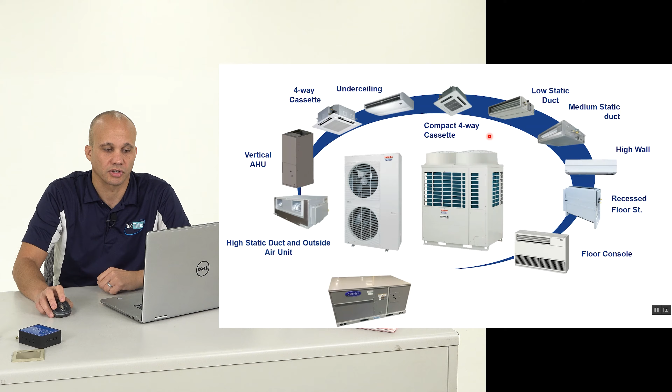For the smaller stuff, we typically have this stacked style with a horizontal discharge on it for the condenser air. And then for the bigger tonnages, like 6 tons and up, you'll see this vertical discharge air style. And those guys can get bigger and bigger. We can bolt them together, so we can take multiple sizes and connect them together to get larger and larger tonnages.

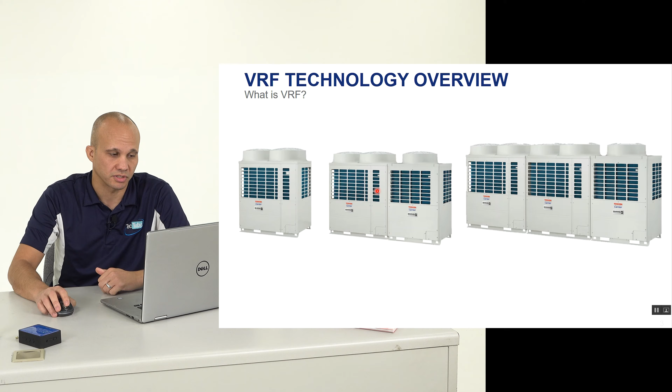So you can do anything from a little 3-ton office space to a 30-story high-rise building with this. It's pretty flexible in that regard. And you may or may not have multiple systems. So I can manifold them together on the outdoor side to connect them up.

So you can buy these in a heat pump version or a heat reclaim version. The heat pump version is typically 2 pipes. The heat reclaim is 3 pipes, although that's not always the case. The heat pump version is the easiest to explain. It works exactly like a regular heat pump. If you're not sure how a heat pump works, we have videos on that you can watch and learn about the refrigeration cycle.

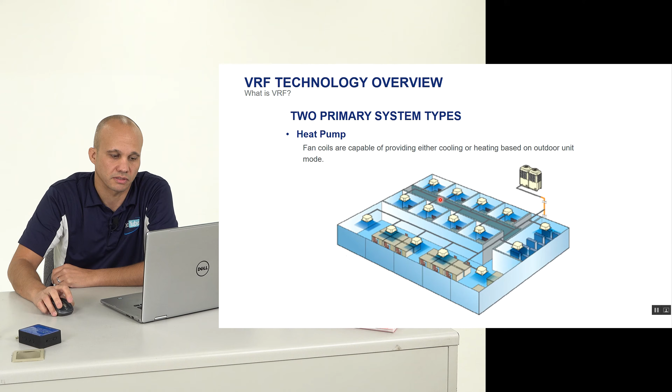So I have my 1 or 2 outdoor units, in this case 2 outdoor units, manifolded together. They send refrigerant down to all these individual units down this piping grid. And each one of those takes refrigerant off. It's kind of like ductwork. It starts out with a large pipe, and it gets smaller and smaller as you get further away from the unit because you keep branching off from there.

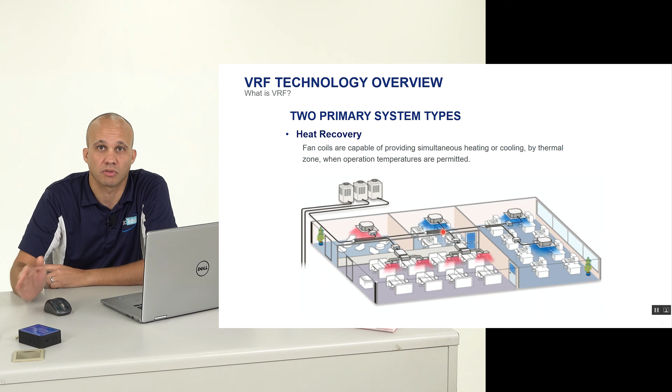The heat recovery is typically a 3-pipe system. So I'll have multiple pipes coming down the middle of the building, and then they'll be going into each individual unit. We need the 3 pipes because we're going to run simultaneous heating and cooling, and I'll explain exactly how that works. So if I have a 3-pipe system, or a heat reclaim system, I have 3 flavors of that shown here on the left. So what I was describing was a 3-pipe system.

So 3 pipes leave the outdoor unit, they go to the indoor units. Each one of them has a selector box where it picks either hot or cold refrigerant and sends that to the indoor coil. You could also have ones where I have refrigerant come down into a larger selector box. Instead of a 1-to-1 relationship of selector box to indoor coil, I can have a selector box feeding 2, 3,

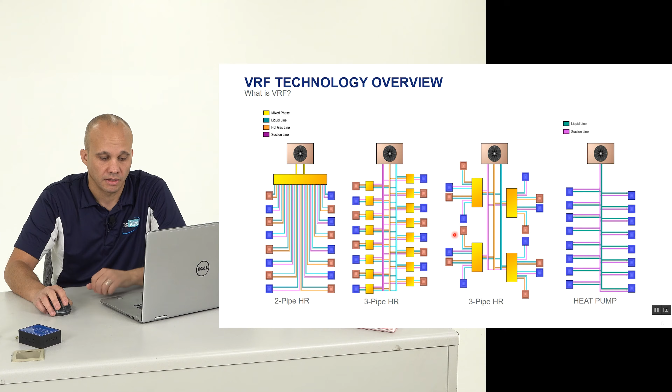4 indoor coils. Or I could have a 2-pipe heat reclaim where I have a very, very large flow selector box that all of the indoor units have to home run their piping back to. And there's different combinations of that. So what that might look like is you might have the outdoor unit sending refrigerant down the 3 pipes. These 2 guys are sharing a selector box. This guy has his own selector box, and then these 4 are sharing one larger selector box.

In these scenarios, even though the outdoor unit is providing simultaneous heating and cooling, each selector box can only do one of those modes. So these 2 guys together on the bottom down here, they would either be in heating together or they'd be in cooling together. Now one of them could shut off, or one of them could ask for less heating or cooling, but they can't ask for an opposite mode. They gotta go together with the selector box.

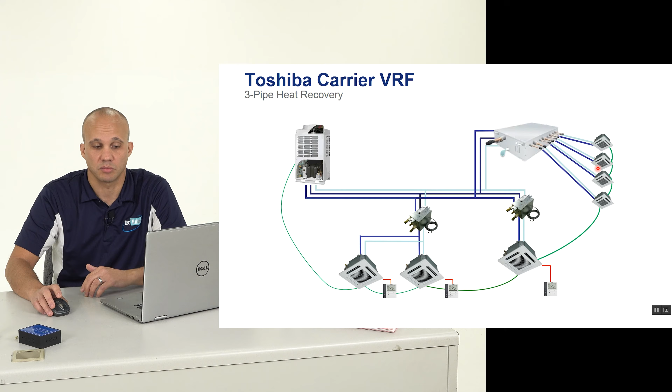But these 2 guys could be in heating while this guy's in cooling, and this guy could be in heating or cooling. So each selector box can be in one mode or the other, but everybody downstream of him has to be in the same mode. So how's that gonna work if you got multiples there? So this is a simple example. We have 2,

8 tons of cooling. So we have 5 indoor units, or 5 evaporator coils as we historically would have called them. And then outside, here's my condensing unit, which has 8 tons of condenser coil and 2 compressors in this case. It has 1 fixed speed compressor and 1 variable speed compressor in this example. Sometimes you're gonna have 2 variable speed or even 3 variable speed ones. More variable speed, the more flexibility you're gonna have, obviously.

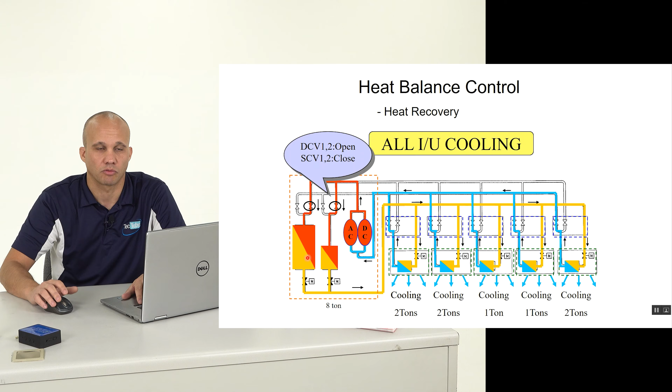So if they're all in cooling mode, they would all be wide open with all of their expansion valves. The condensing unit would be running maximum capacity, and it'd be like a regular split system, except your evaporator coil is in pieces in different rooms. If they all go to heating mode, it works the exact same way. Reversing valve flips for the heat pump.

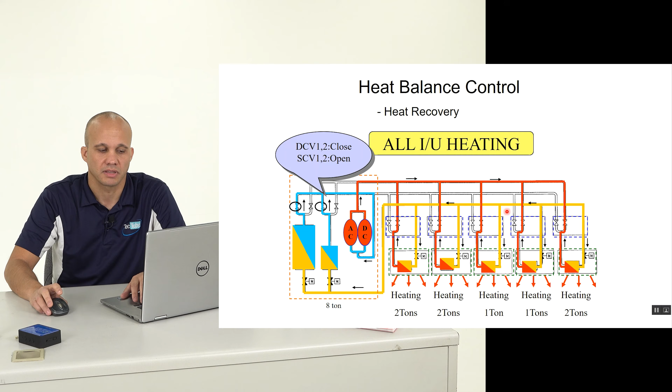Now my outdoor unit becomes the evaporator coil, my indoor units become the condenser coils, and in this case, all of the expansion valves are wide open, so I got full flow. That's all pretty logical and works kind of like a heat pump, except I have multiple indoor units. Then what happens if I have some zones that want heat and some want cooling?

So now I have 4 tons that want cooling, and I have 1 ton of heating, 12,000 BTUs of heating. So what ends up happening is the outdoor unit goes into cooling mode because more zones want cooling than heating. He runs at 3 tons of condenser capacity, even though I have 4 tons of evaporator capacity requested. And that other zone that wanted 1 ton of heating, he's a 1 ton of condenser coil.

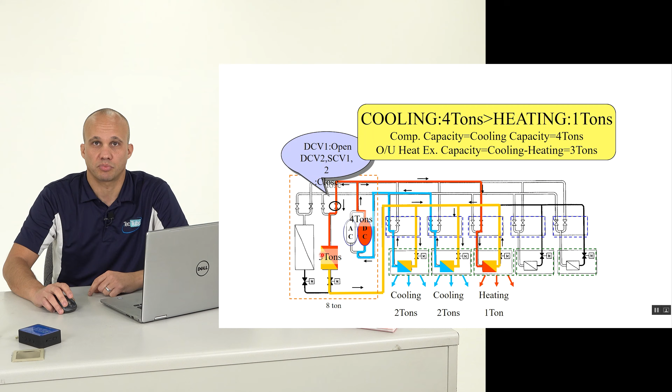So I have 4 tons of evaporator coil here, and I have 3 plus 1 ton for 4 tons of condenser coil. It just so happens that one of the condenser coils is inside the space. In that case, one of my compressors shuts off, and the other one ramps down to 4 tons. So I'm getting 5 tons of heating and cooling capacity for the heat rejection price of 3 tons for the compressor horsepower of 4 tons.

If more zones wanted heating than cooling, same kind of thing would happen. The outdoor unit would switch to heating mode. Now I have 6 tons of heating being requested, 2 tons of cooling. So the cooling guy becomes an evaporator. These 4 guys with the 6 tons of heating become condensers. The outdoor coil becomes the other 4 tons of evaporation. So I have 6 tons of refrigerant evaporating, 6 tons of refrigerant condensing.

The compressor is running at 6 tons total, even though I'm getting a total of 8 tons of capacity. So it's kind of sweet. It's like I'm getting, in this case, 2 free tons of cooling, whereas over here I was getting 1 free ton of heating. Just taking it from the other zones, moving it from zone A, putting it in zone B essentially.

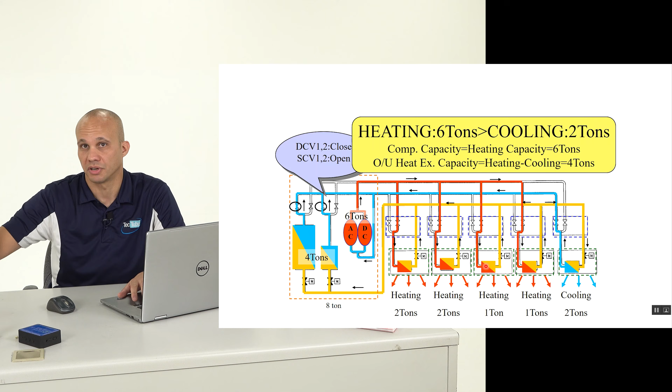And then in the perfect scenario, if I had everybody balanced, I have 4 tons of heating requested, 4 tons of cooling requested. All the coils outside would shut off, and I would just be using this compressor as a circulating pump to move the 4 tons from 1 zone or 2 zones to the other 2 zones.

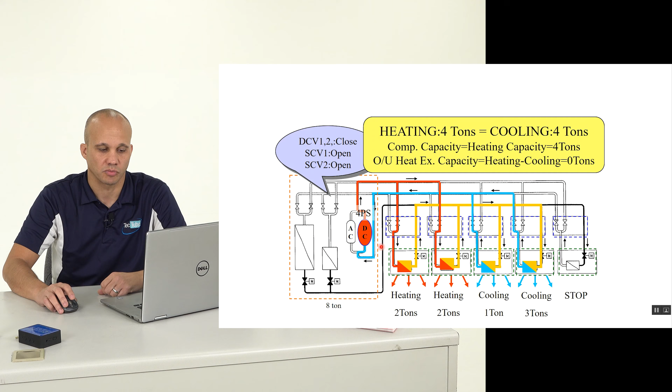So this unit that I showed you before, this is actually the outdoor unit, like we were just talking about. This one is the condenser if I'm in cooling mode, or it's the evaporator when I'm in heating mode, and it can go either way. So the one we have here is the 3 pipes like we mentioned, and those go across our lab, and we'll go down there in a minute, but they hit 3 ceiling mounted units as well as 1 high wall unit. And we'll talk about how those guys pipe out.

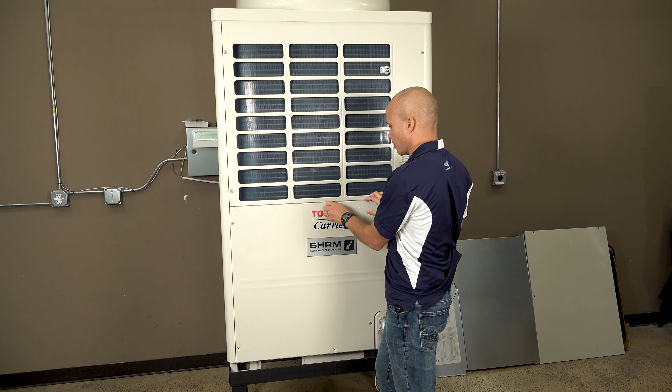This one's a little intimidating. I left just 1 screw in the panel just so I can open it up easily, maybe. So as you can see, there's a lot of stuff going on. So this is not something you want to just show up on a job site and just start working on.

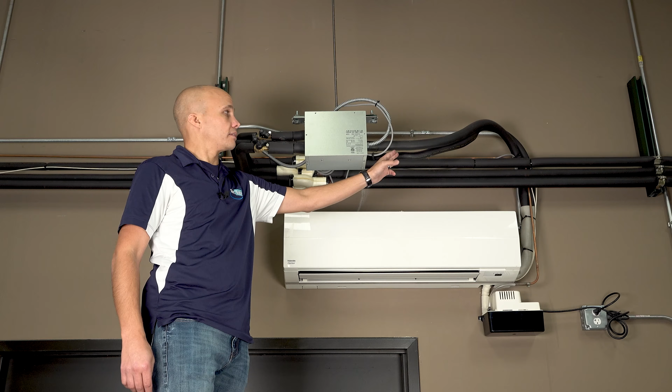Let's go take a look at the indoor unit side, which will be the evaporator or condenser coils. All right, so the 3 pipes are coming down from the outdoor unit. They're gonna loop back around in this case. Now, we're looking at one of the high wall units here. As I mentioned, the same system has cassette units, ducted units. You can even have floor consoles and stuff like that. But the first one on our piping run happens to be a high wall unit.

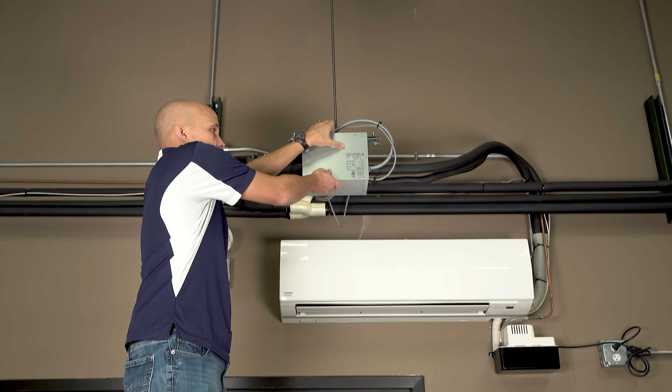So the 3 pipes are gonna come in to this flow selector box. This is a single zone flow selector box. There are other versions that you can have multiples, but this is a single. So it's gonna come through here. We just have a bunch of solenoid valves in here. And essentially I'm gonna have 3 pipes coming in, 2 pipes going out.

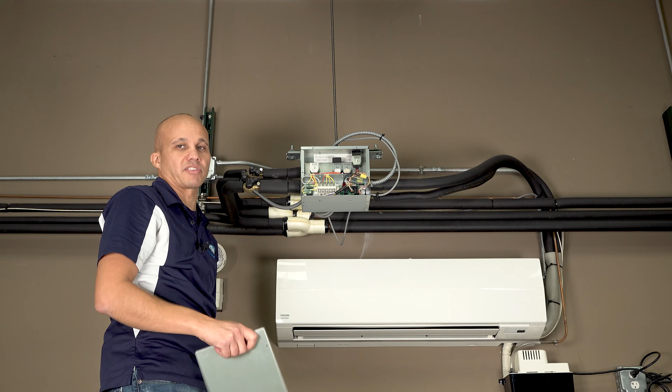And the way I like to think of it is I'm gonna have a hot gas pipe and a cold gas pipe, right? And I'm picking whether I want to have hot or cold fluid coming over here to my unit to cool or heat the space. So I got, in this case, 4 solenoid valves. You might have some with 5, may have some with 7. Just kind of depends on how many zones you have on here.

On the piping side, I have a liquid line, which is the little guy in the middle. And then I have a suction gas and a discharge gas. On the outgoing side, the indoor unit, I just have a liquid and a gas line, and they change their jobs as I change my modes. And then the 3 pipes would run along the rest of the wall to the 2nd, 3rd, and 4th unit. I might have different style indoor units, but they're all gonna work the same way and have this same kind of selector box.